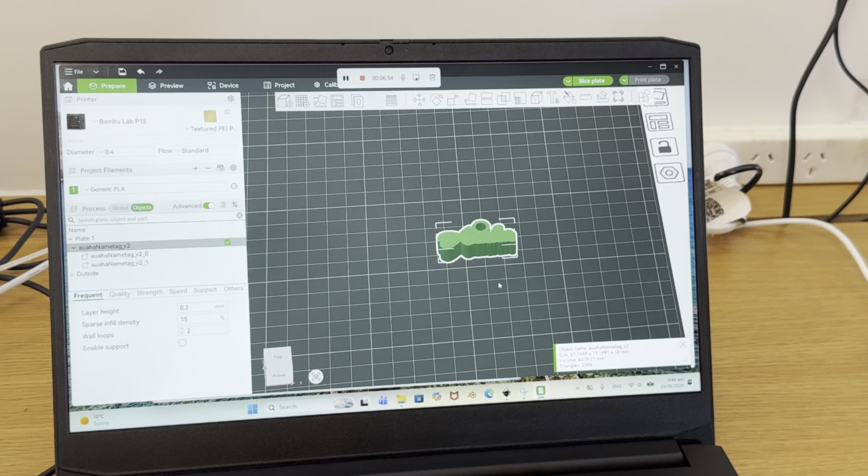One of the nice things about Bambu Studio is it can create 3D models from SVG files simply by giving them thickness, as usually an SVG file is just simply a 2D vector graphics file. So clicking over to this Objects tab, you can see I now have 2 objects in here - we've got the backplate, and we've also got the text. Currently, these are actually combined into one main piece.

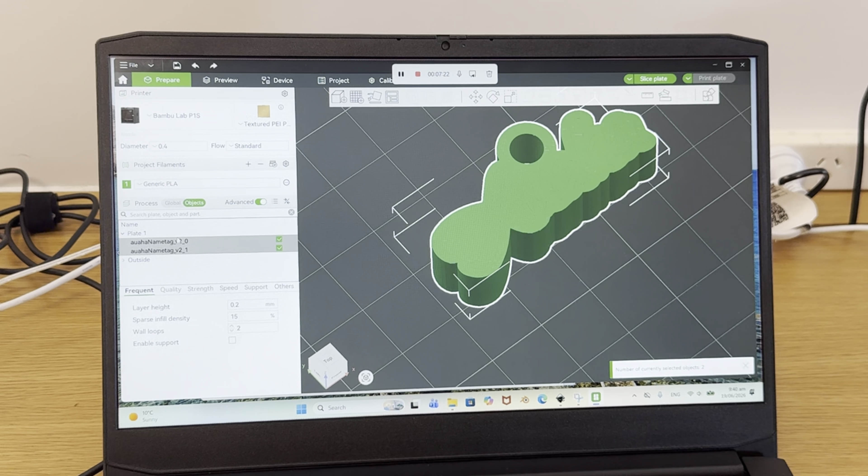So we're going to right-click on that piece and go and find Split, and split them to objects. Okay, so now we can manipulate these individually without affecting the other part.

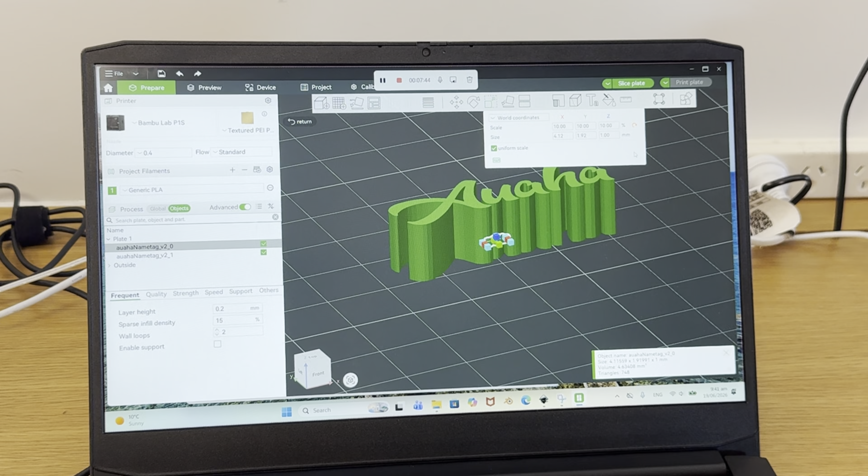I'm going to take this backplate first of all and jump over to the Scale tool, shortcut is S, and I can go ahead and just scale this nice and flat, something like this. I don't need it too thick - I'm thinking maybe even just something like 1 millimeter thick should be plenty. You can see when I change the number here, because I have uniform scale turned on, it's going to affect all of my X, Y, and Z. So if I untick that, I can give it a specific measurement - 1 millimeter should be plenty.

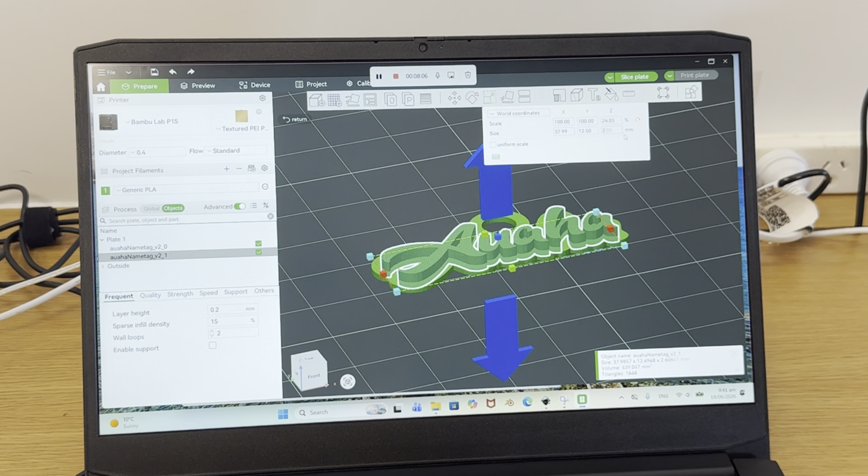Okay, I'm going to do the same for my text now. So I'm going to choose the Scale tool once again and just scale this down to something like this. We could go maybe 2 millimeters on this one, 2 millimeters on this one, and that should be pretty good. Just for now, just so we can see clearly, I'm going to create another color in here, and I'll assign this as a color to this guy, so we can nice and clearly see how that's going to look when we print it.

We'll be using some different colors, but it gives a pretty clear indication. If we were using an AMS, which we are not today, this would actually be all we would need to do to choose our colors.

But because we are not using an AMS, we're going to set a manual pause, and you'll see how we do that soon. I'm going to select both of these objects again and simply right-click and choose Merge to turn them back into a single object.

I think we're pretty much good to go. Now, because we're not using an AMS, I'm going to remove that other color, as it was just to see how that might look. Okay, so let's click Slice Plate, and we can go ahead and see how the 3D printer will slice this into several layers.

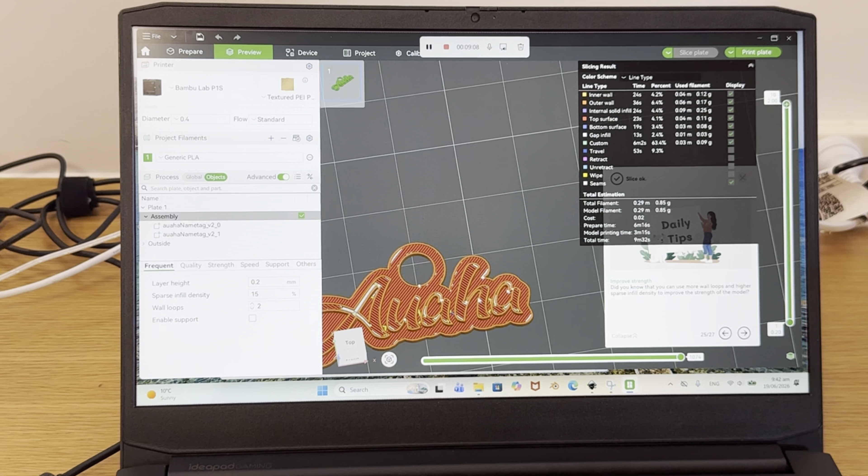Just clicking over on the side, you can see each of these layers one at a time. This is going to take 9 minutes to print, and it's only going to use 0.85 grams of filament, which is pretty fantastic. Now, the final thing I need to do here is find the point where I want to change filament, which will be this layer here, layer 6.

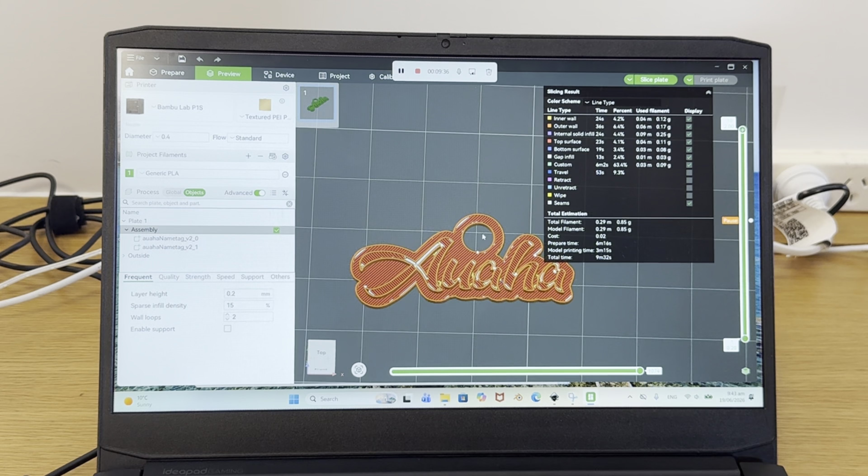I'm just going to right-click and add a pause. This is a manual pause, which will allow me time to swap over the filament so that I can resume the print. So we'll slice one more time, and we are now ready to print.

Usually you'll get one of the Auaha staff to help you out at this point, but if you're lucky enough, they might let you do this too.

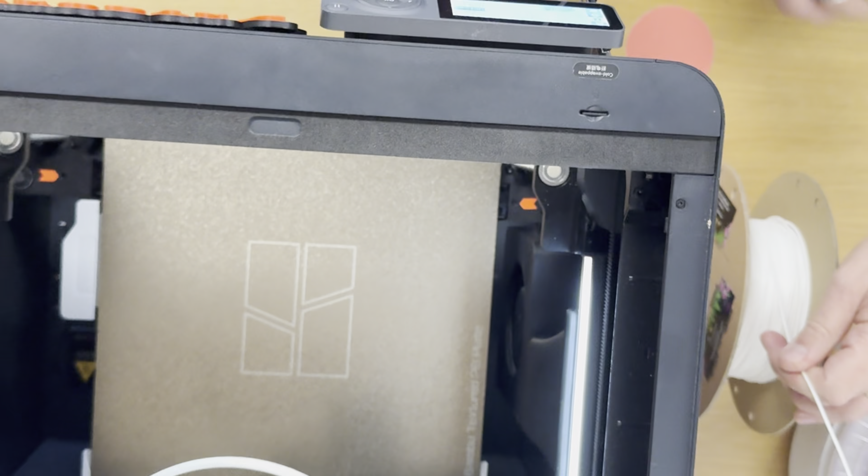So simply going on the screen and choosing Feeding and Load is all we're going to do here. We just need to wait for the print head to heat up to about 190 degrees. And in the meantime, I'm going to push this filament all the way through and wait for it to load.

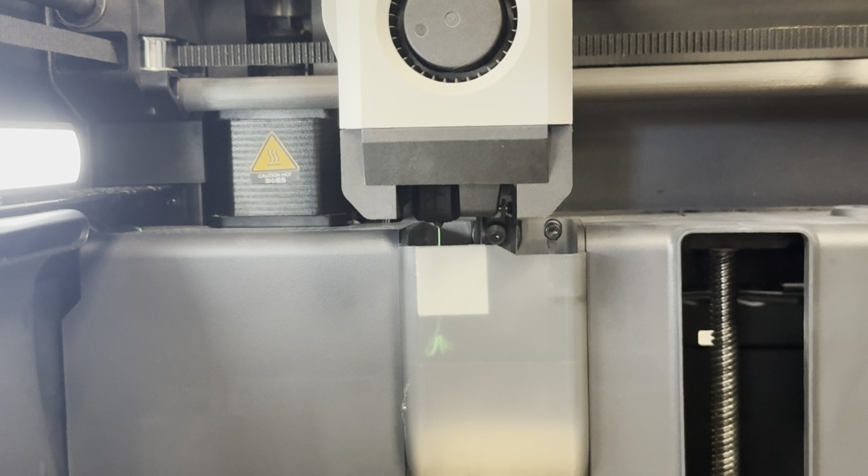Here you can see we have some filament extruding, so that's all good to go. We're over here on our staff computer now, and we can basically just click Print Plate.

But before we do that, let's just make sure it's at the right size. So let's take a look. If I select this object, you can see that we've got about 4 centimeters, 41 millimeters as the overall length.

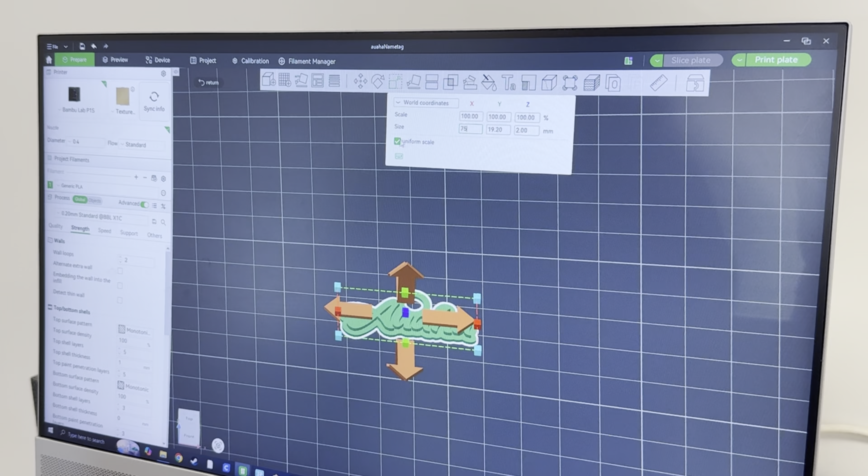I think that's a bit small myself, so I'm going to change this one to, let's say 75. And you can see I've got uniform scale turned on this time. So that's nice and big this time.

I'm actually going to untick uniform scale and just make it nice and thin again. So we'll just go 2 millimeters for the overall thickness. Let's slice that once again.

We probably need to make sure that our automatic pause is at the right layer. It is, so that's great. And now we can just simply click Print Plate and get this printing on our 3D printer.

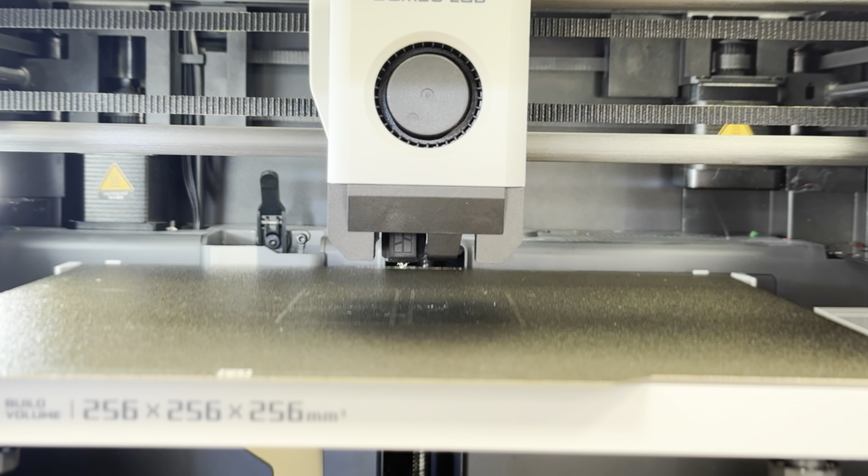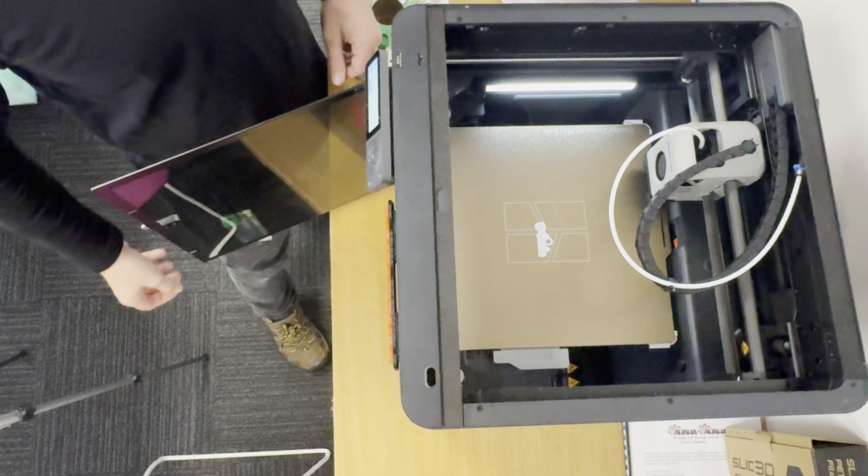You can see we've hit our automated pause, so this is the time where I swap over the filament. Making sure to use a type of filament that has the same settings. So in this case, I'm using PLA for both, so we shouldn't have any issues.

I'm just going to tell it to unload first of all, which shouldn't take too long as it was already nice and warm. After unloading your first filament, simply load in the second, and then we should be good to resume.

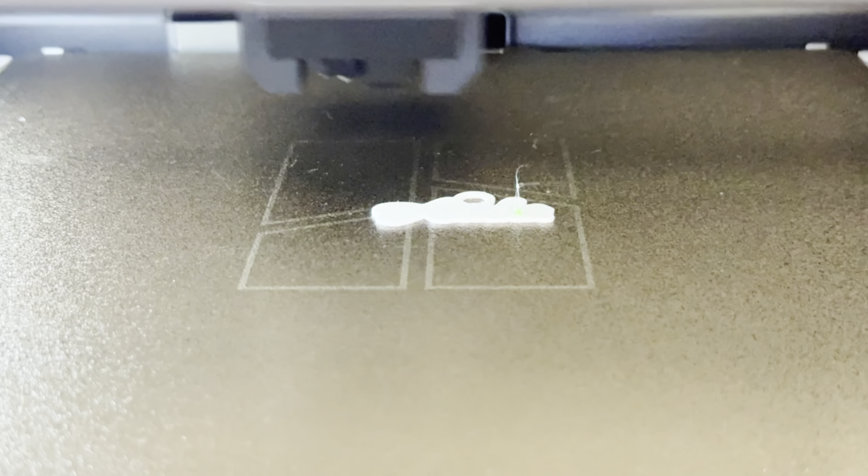And now we have a finished 3D print. So let's open the printer and take a look. Ooh, all right. You can see our finished print on the build plate. Just take that off.

Awesome. I don't know about you, but I think that looks pretty fantastic.